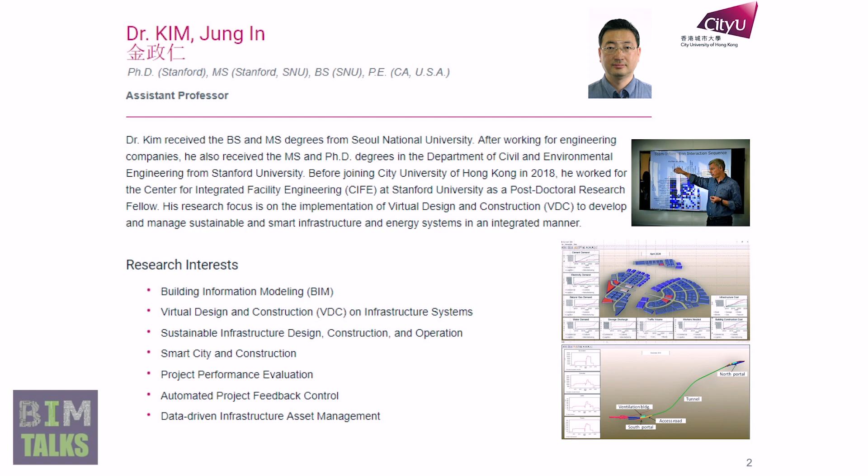My previous supervisor was Martin Fischer. He is one of the most famous people in our VDC and building information modeling community. When I started my PhD, Martin Fischer and I investigated the research opportunities and issues related to implementation of BIM for infrastructure or horizontal construction projects. Because at that time, most research about building information modeling focused on vertical construction projects, like building construction projects.

So I carried out several research projects regarding implementation of building information modeling. Today I'm going to share some of my research experience with you. First, I will share research experience about large-scale development, tunnel construction, and the airport extension project.

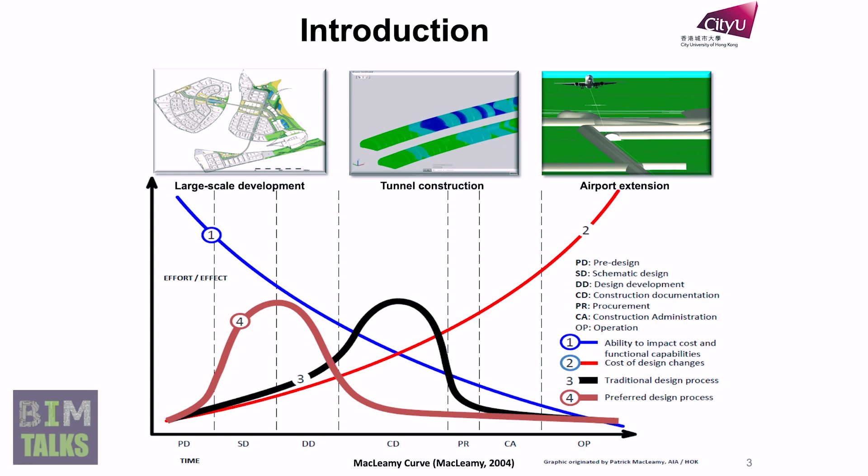Have you seen this curve before? Anybody? No? Yeah, someone. The main idea of this curve is that if we spend more effort in the early project phase to make our decisions, this will give us more opportunity to improve our project performance. So let's see how implementation of BIM for civil or horizontal construction projects can contribute to spending more effort in the early project phase.

Let's first take a look at how I implemented building information modeling for large-scale development. Large-scale development can include site formation projects like Kai Tak development or Old Town development. It can also include smart city development. This kind of project usually involves lots of stakeholders. To make better decisions, we have to engage those multiple stakeholders at the beginning of a project.

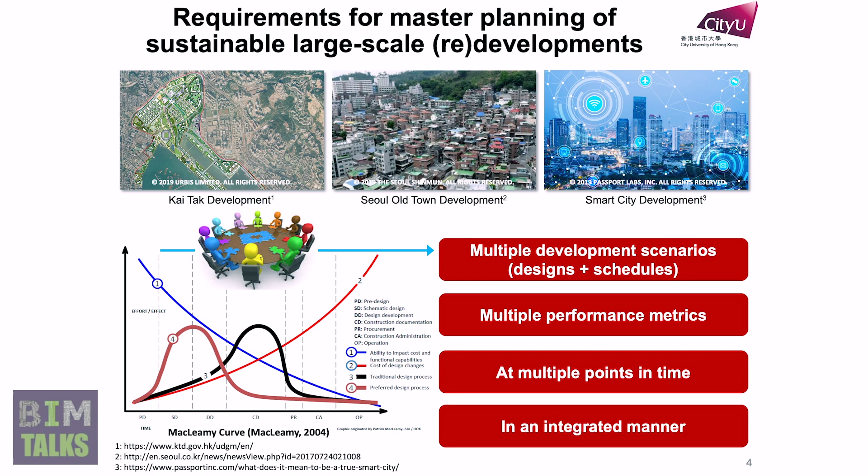To do that, we have to consider multiple development scenarios and multiple performance metrics at multiple points in time, and we have to do this in an integrated manner. But the problem is that in practice, our usual paper-based delivery method cannot give us a good opportunity. For example, information is not timely searchable. Also, it's not integrated, so the multiple stakeholders sometimes have difficulty understanding what planners considered or intended.

So one idea is that if we can display development scenarios with multiple performance metrics over time, that should improve our communication among different stakeholders. But this is not that easy. To follow our manual process, first we have to extract area information for each plot from our design. Then we have to accumulate that into the different land uses, and then using specific coefficients, finally we can figure out specific performance metrics.

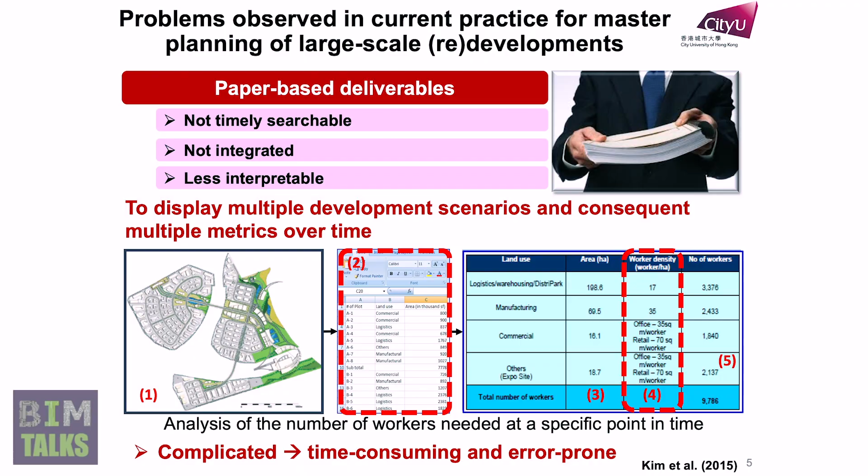This is only one case, one specific point, one performance metric for one development scenario. That means if we want to consider multiple scenarios, multiple performance metrics at multiple points in time, it will be very complicated, time-consuming, and also prone to error.

To overcome this challenge, I developed a BIM-based decision support method for master planning of large-scale development, and also developed the development strategy simulator, which I call DSS. This method first formalizes 3D information, like building type and plot ratio. It also formalizes coefficient information using performance metrics, building type, and related tasks. Using that information, it generates a 4D model, analyzes multiple performance metrics, and then visualizes and displays the schedule and development progress as well as multiple performance metrics at the same time.

So I applied this DSS for the Qatar Economic Zone project, and the first thing I needed to do is develop a 3D model. The different colors in this picture represent buildings in different land uses. And then I needed to identify what kind of multiple performance metrics the client wants. After iterative discussion, we figured out 9 performance metrics from different areas: environmental, social, and economical,

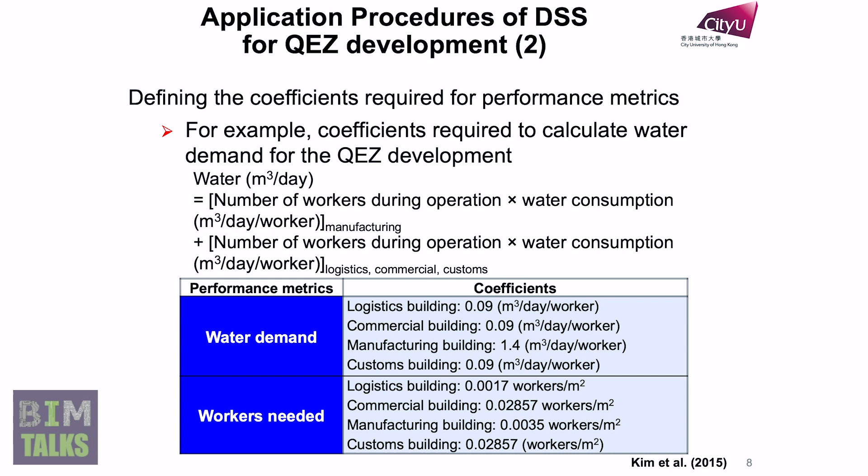land uses. Based on that, as you can see, this is the application result of DSS for the QEZ development project. This is the development progress. We can see the change of performance metrics. In this case, cement demand is related to construction phase, and electricity demand is related to the operation phase.

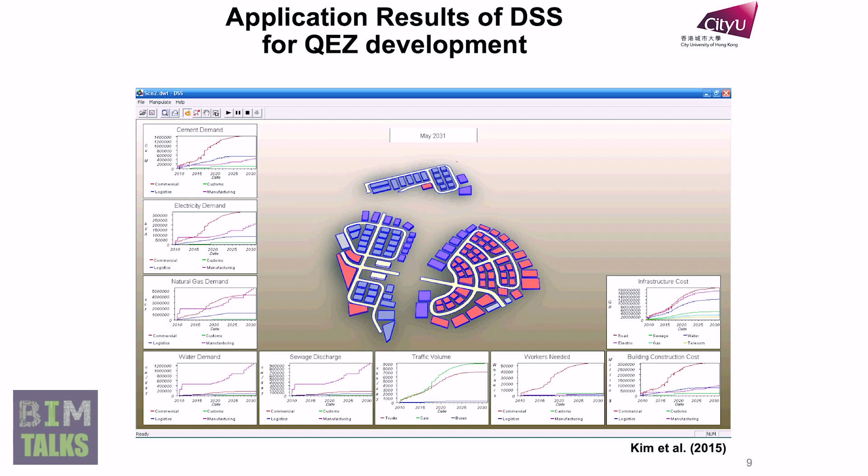So multiple stakeholders, even those who are not familiar with schedules, can easily understand how the development progresses and what kind of metrics they can have at a specific point in time. That means they can have better communication with different stakeholders. So that's one thing I want to show.

And next, we also applied the DSS for a tunnel construction project in Seattle. The general contractors wanted to see different multiple performance metrics. This case is something different from the previous case. They wanted to see the amount of excavation, the amount of concrete required, and the number of labor required at a specific point in time. So after that, they can share these ideas with subcontractors and make better decisions.

But after that, we had some discussions, and we figured out automated schedule generation considering uncertain ground conditions is required. Dealing with uncertainties in ground condition is a very common problem in tunnel construction projects. As you can see, this is one example from tunnel construction in Nepal. Class 1 is the best rock mass class, and class 7 is the worst ground condition.

And before excavation, in the prediction of ground condition, the dominant rock mass class was class 3. But after excavation, the dominant actual rock mass class was class 6. That means there are significant differences, significant uncertainties in ground conditions.

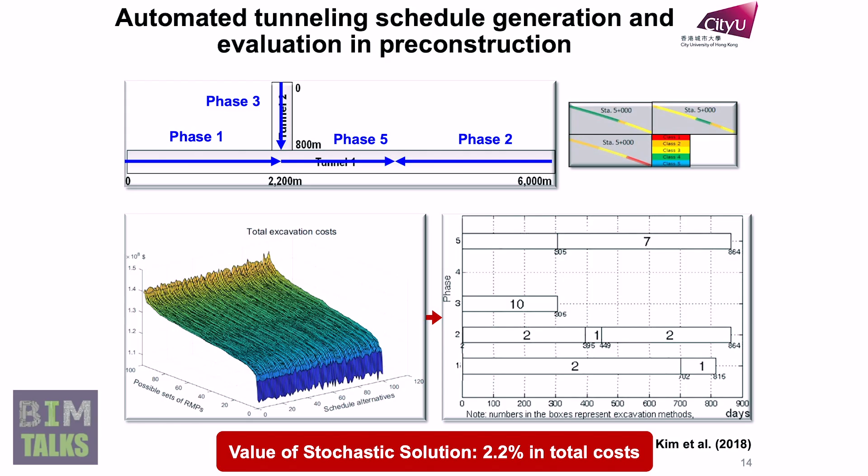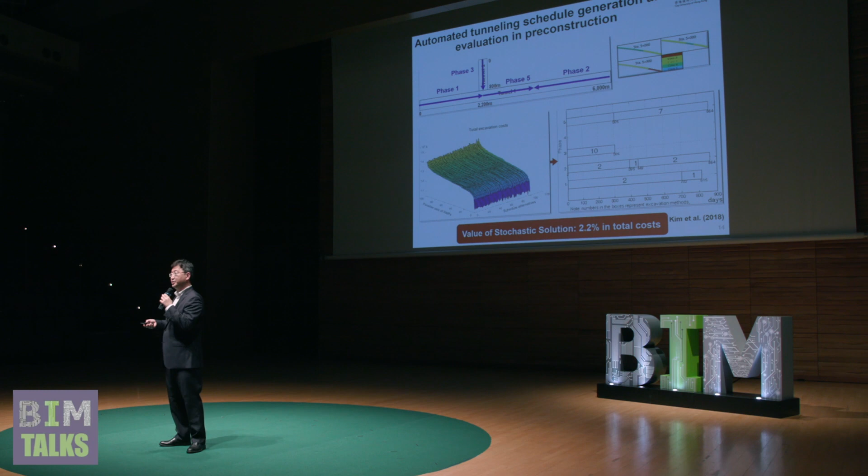I applied this method to one 6-kilometer tunnel in pre-construction and construction. We considered 100 scenarios of ground conditions, and this method generated more than 100 schedule alternatives, and then identified the best schedule considering multiple possible scenarios of ground conditions. So this method could generate a schedule with 2.2% less total cost than existing or current practice could generate.

We also applied this method to the same project during the construction phase. As I mentioned, we collected more information about ground condition during construction, in this case by using face mapping information. Using that up-to-date information, we repredicted 100 possible scenarios of ground condition, and this method generated more than 100 schedules. Based on that, we evaluated them and finally identified the best schedule among more than 100 schedules.

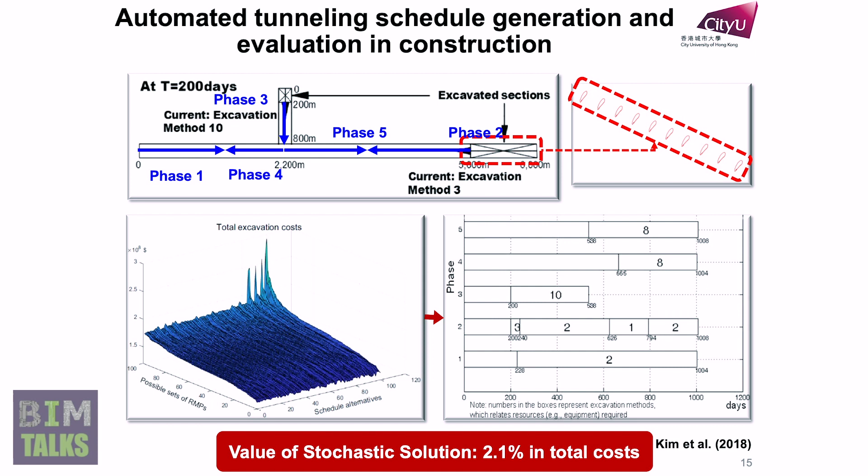And in this case, this method could generate a schedule with 2.1% less total cost than existing or current practice could generate. So that means the method helps us to find better performance metrics.

And now let's move to how I implemented building information modeling for an airport extension or airport improvement project. During operation of the airport, lots of construction activities occur, because sometimes we need extension or improvement, for example, Dublin Airport, O'Hare International Airport. But the problem is that these construction activities often produce construction dust, and especially during landing, the construction dust blocks or reduces visibility. So we have to have construction dust mitigation.

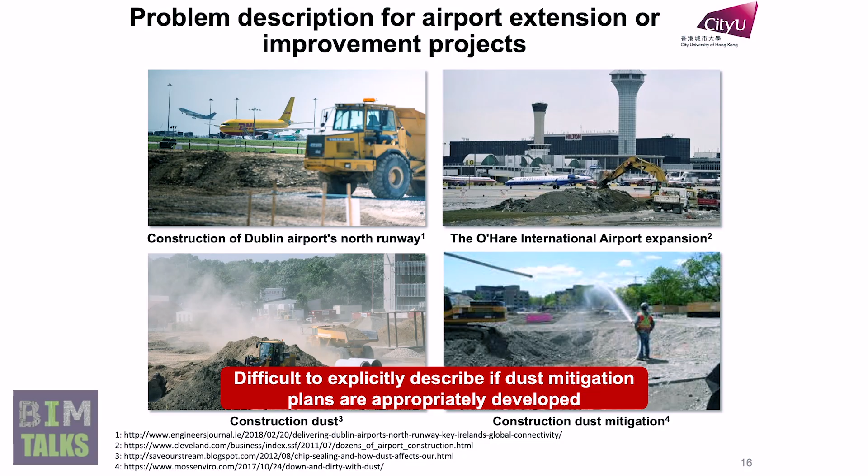So in advance, general contractors usually need to explicitly describe if their dust mitigation plan has been appropriately developed. But in the current method, it is really difficult to explicitly describe that. So we first defined a dust cloud as a geometric representation of the extent of dust at a specific density, and then we determined feasible distance considering flight spacing.

As you can see, based on that, general contractors identified when or where they have to have a dust mitigation plan, and they can explicitly describe their dust mitigation plan to the client and confirm they have appropriately developed their dust mitigation plan for the airport construction. So that's all I want to explain today.

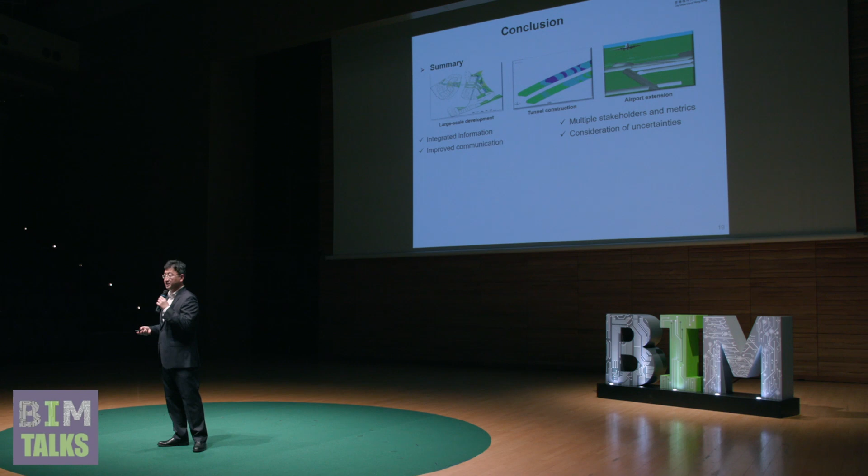So I want to wrap it up. I described 3 different types of projects to explain how we can implement building information modeling for horizontal construction projects. This implementation could integrate information and involve multiple stakeholders and metrics, improve communication, consider uncertainties, improve performance metrics, and automate generation and evaluation of decision alternatives.